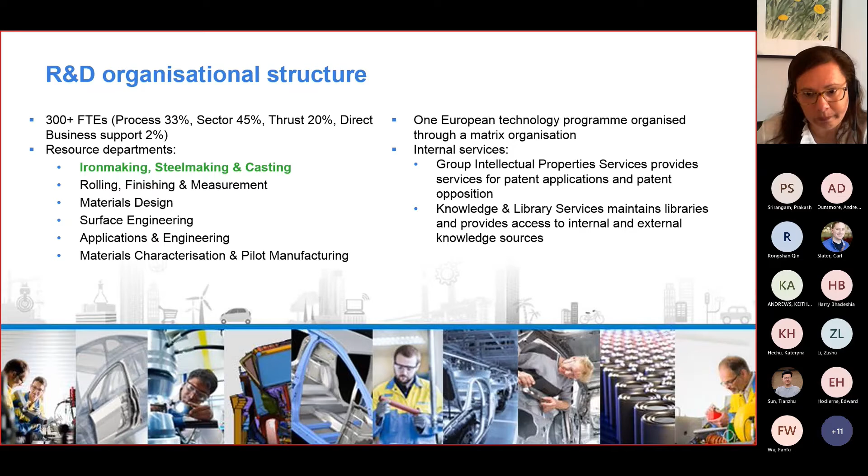We do not do everything alone, so we broadly collaborate with universities and institutes. Sometimes we also collaborate with competitors on a project basis, for example on RFCS projects, across knowledge groups, universities, and institutions. You only win and enhance yourself, and thus enhance the research.

We have collaborations within the Netherlands with most of the universities there, but also in the UK. Warwick and Swansea are very keen partners to collaborate with us. However, that is not all. We also collaborate outside Europe, for example with the McMaster Consortium, with USTB in China, and the Continuous Casting Consortium at Colorado School of Mines.

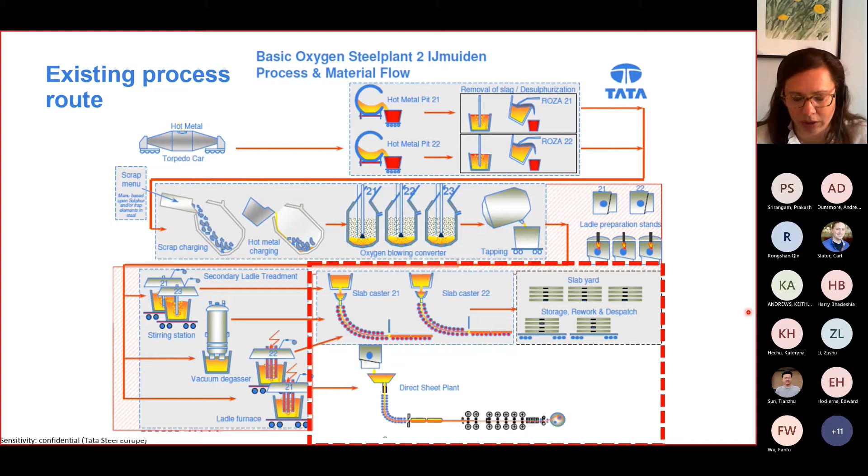But we also have a thin slab caster, which is a caster for thin slabs, which is directly cast, reheated in a homogenized temperature in an oven, and directly rolled afterwards.

In this overview, I wanted to show you the past, present, and future of solidification research. And before that, I would like to explain a little bit about some interesting concepts.

We find it as a key concept for solidification and casting. The solidification of a steel will really be a fingerprint that marks many of the properties of the final product.

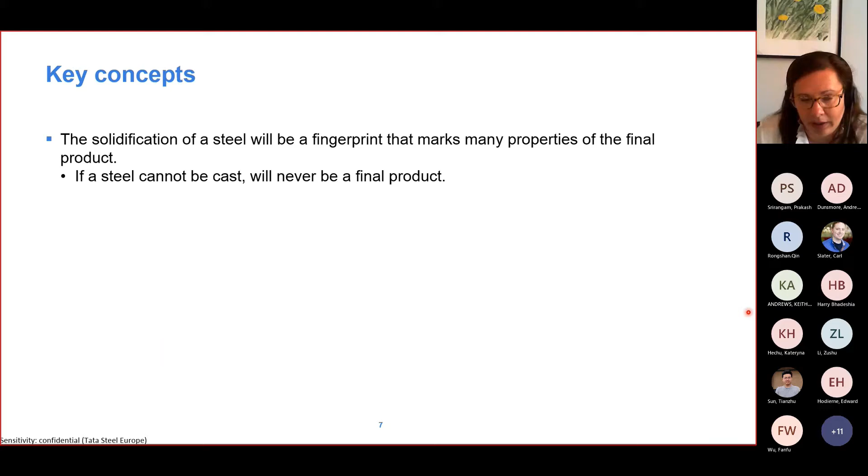Moreover, if a steel cannot be cast, if we design a steel or a composition that cannot be cast, it will never be a final product. And the question is not if we can cast a steel, but how can we cast it?

So I am a strong believer that there is almost always a way, almost always a process that you can cast a particular composition, but how are we going to do it? And your selection of which process, that's your choice.

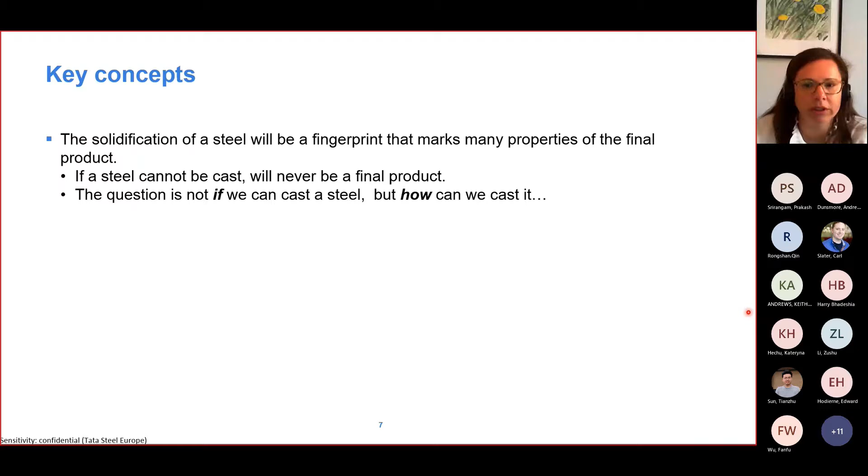For that choice, nowadays there are tools, mathematical and physical models, available to help on understanding and to make a choice on the process parameters. But these tools are used wisely, we are obviously not the only ones using them. They all help you not only understand the actual process for troubleshooting, but also for designing new steel grades. But you know what? A model needs material properties.

Let's not forget that the thermomechanical behavior of steel depends on each steel grade. So the chemical composition of that steel grade is very important, and it will mark many of the thermomechanical properties. Moreover, there is a mechanical effect, and the deformation during a process, during continuous casting, is very dependent on the process itself, on the process parameters.

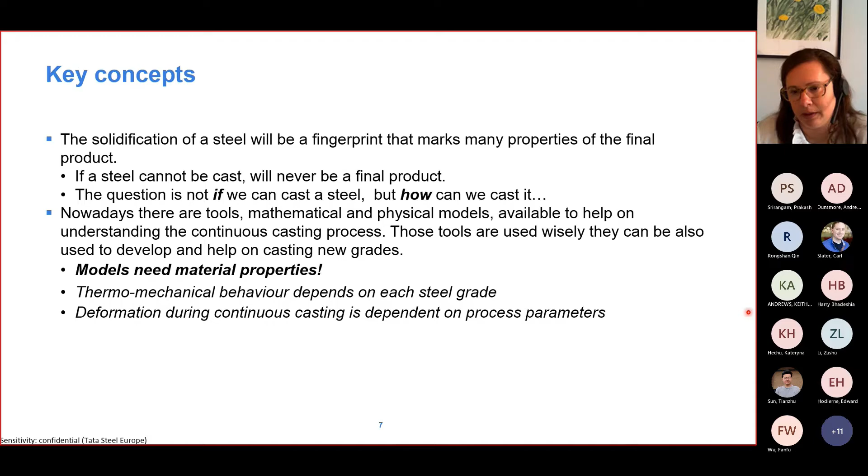If we focus a little bit on casting and continuous casting, basically we have two regions. We like to call the first region the mold region, where the steel starts to solidify, the slab is born, and the solidification range, or at least the temperatures we handle at this stage, are rather high. It is normally between liquidus temperature and solidus temperature. Both the liquidus and solidus temperature could vary a lot depending on the steel composition.

On the mechanical side, here is where we have the first ductility trough, and it is considered to be between 0.9 to 0.99 fraction of solid. Again, it's very dependent on steel composition.

The second region is the secondary cooling region. This one has a much broader temperature range, more or less between 1300, where it exits the first region, up to about 700. Below that, it's not normal. It could happen, but it's not normal in continuous casting because the steel becomes too stiff and too cold to be able to move it and further process it, or at least extract it from the machine.

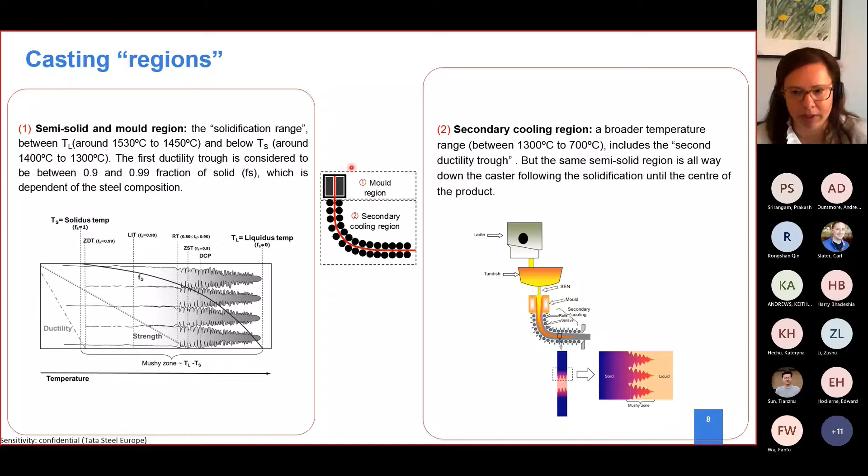No, this didn't go that good.

Two regions for research: if we focus again on the mold region, or at least the semi-solid region, what do we need to research to understand that region, to explore for new steels, for example?

Well, first of all, we need to simulate the cracking and the continuous casting conditions. That's very important because a defect in a product will never be solved. But moreover, we need to understand the solidification, particularly of new steel grades. There are very advanced high-strength and ultra-high-strength steels. They are extremely challenging, not only because of their chemical composition, but mostly because of their complexity. And that includes also, for example, precipitation.

What we have internally at Tata Steel, well, we have something I will show you later, called the Mould Cracking Simulator. We have a thermodynamic software - we have Thermo-Calc, and we have MICRESS, which is a microstructure phase field simulation software.

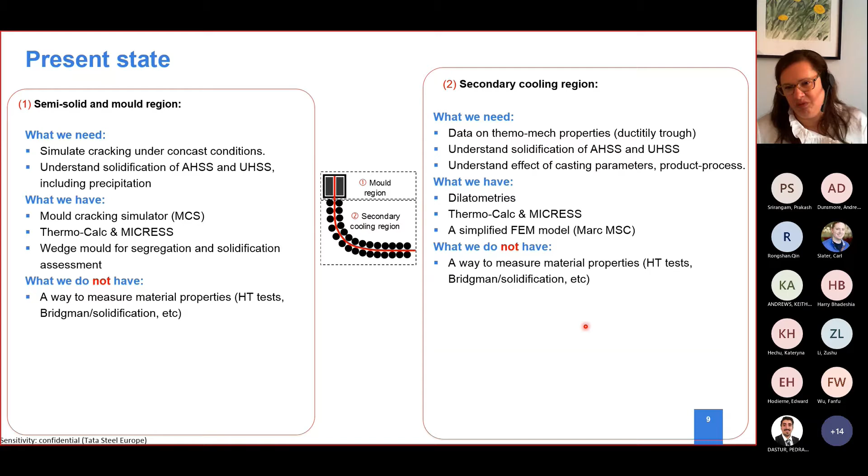But why? Why do we need the modeling and solidification lab tests? First of all, we have CALPHAD, so calculated phase diagrams. And what is the relation with steelmaking?

A long time ago, a very simplified way was the carbon equivalent formulas. So you had a way with a simple formula - it's still used, by the way, on a daily basis. It was a way of seeing what would be the effect of other alloy elements rather than carbon, as if they would react the way carbon would react. It was also easier because it was the carbon phase diagram. So this is like seeing in black and white, really.

If you would have gone to 16 colors, let's say, you would have ternary and quaternary diagrams. However, probably the most used way nowadays is when you are with some more colors, 256, with a thermodynamic software. So when you have complex systems, you just cannot simplify everything in black and white. You really need a broad range of understanding.

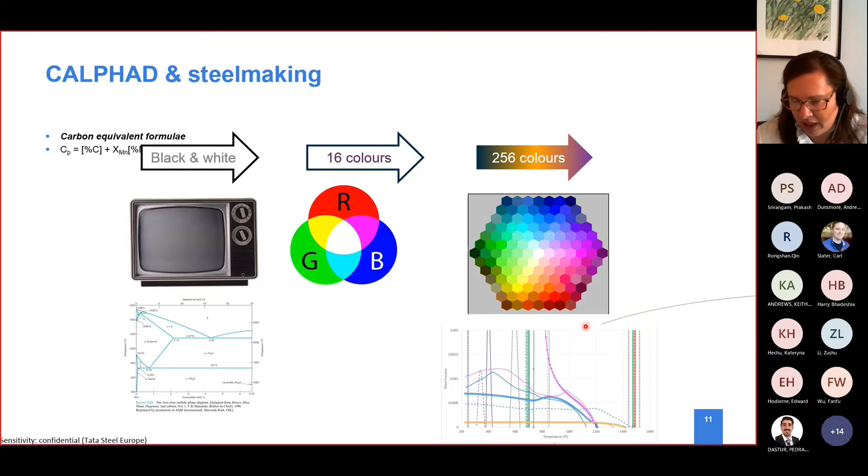So with phase diagrams, you know, you can calculate a lot of things. Nowadays they are fantastic programs - fantastic software to calculate either phase diagrams or at least phase fractions, which is much more useful than a single phase diagram or a pseudo binary diagram.

However, the calculations are done on equilibrium. You could use Scheil, but it's the extreme. The reality is really in the middle - between equilibrium and Scheil.

But then sometimes you need something that tells you about the precipitation, the precipitate composition for each steel. You could also calculate it with Thermo-Calc or with any thermodynamic program. However, it's a simple method - it is good enough, it's not bad at all. It's much better than a carbon equivalent formula.

But you need kinetics. So there are some limitations that you have to be aware of. Just remember, going from a black and white simplified iron-carbon system to a multi-component system is not easy - not only to calculate it, but also to understand it, particularly on a daily basis for steelmakers.

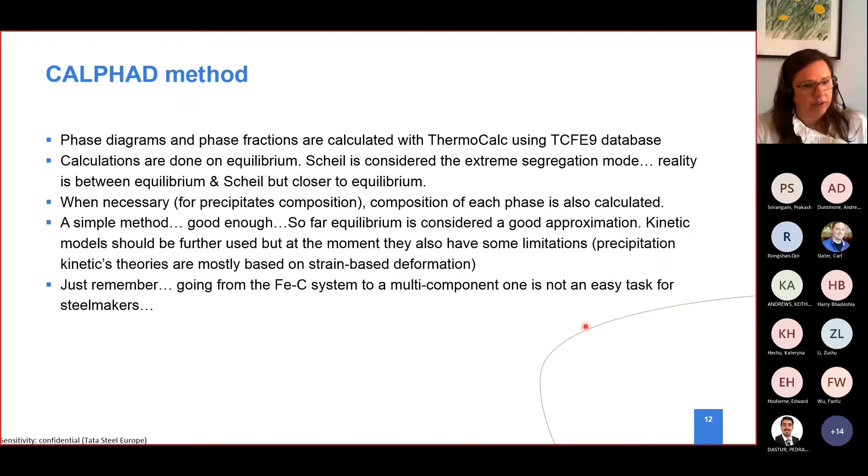Again, the question is not if we can cast the steel, but how can we cast it? And I will show you how.

Thermodynamics are helping us, or have helped us, to understand the steels. Kinetics, again, you need some kinetics for the precipitation, but with an equilibrium, you are good enough.

We know that when you have high strength, low alloy steels, they are known to have microalloyed elements. Why micro? Because they are alloyed in a very small amount, so micro scale. Sometimes it's boron, for example, at the level of ppm. So they have very, very little amount of these elements in the composition, but this very small amount affects broadly the ductility of the steel.

It is very well known that even though they are beneficial, because we add them to the composition to improve the final properties of a product, not for nothing, you have some disadvantages during processing: they are known to have a ductility trough. I explained before that the first ductility trough happens at the semi-solid region. But then while cooling, you have a second and sometimes a third ductility trough, or even an overlapping of several troughs, depending on the precipitation, the processing, and the phase transformations happening due to the chemical composition.

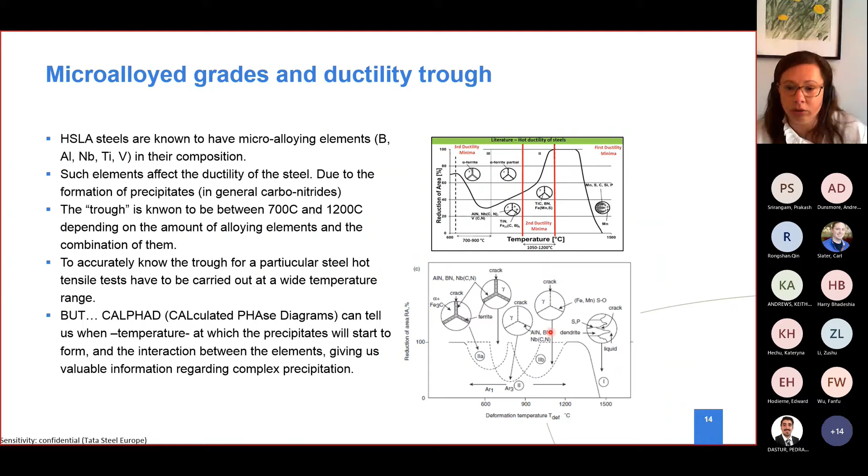But what happened? Why are we interested in this? Well, if this precipitation happens, if you have a ductility trough, it means your steel is less ductile and it could even crack if it exceeds certain stresses during casting. That point is very important because it happens, depending on the precipitation of the steels, either at the bending or at the unbending of the continuous caster.

Here are some examples of how the cracks look. On a slab, they are normally transverse cracks. This is the casting direction, so the cracks will be like this here. This is a corner crack. But eventually, if I don't see these cracks and the product is rolled, it will look like this.

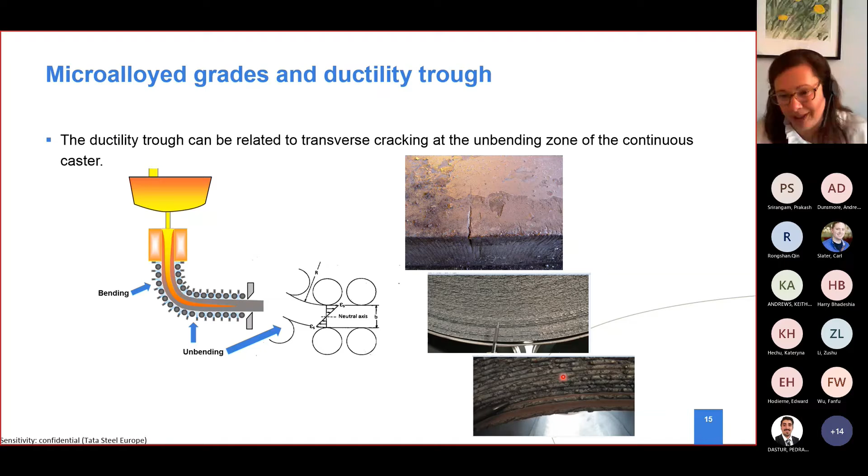Well, this steel was certainly not meant to make serrated knives. Really not. And so this is not something that we want to sell to our customers.

In this example, so what happened? We have a chemical composition that's somewhat peritectic. We have quite some manganese. Aluminium is added for deoxidation, but we need to take it into account because at least a quarter of the aluminium added, even for deoxidation of the steel, could bond with nitrogen, because we have quite some nitrogen, at the ppm level. And then we have some niobium and titanium in this steel.

So let's use ThermoCalc. Let's see what we get in a phase fraction versus temperature phase diagram. If I zoom in on the areas where these precipitates start to appear, ThermoCalc is very flexible, but we need to understand what is happening here.

ThermoCalc says each precipitate is a new phase, that's how it calls it. So for us, it's a precipitate. Indeed, if you saw the microstructure, you could consider it a new phase because it has a different crystallographic structure. But depending on their composition, their affinity, and temperature obviously as well, this is equilibrium again, they will appear at different temperatures.

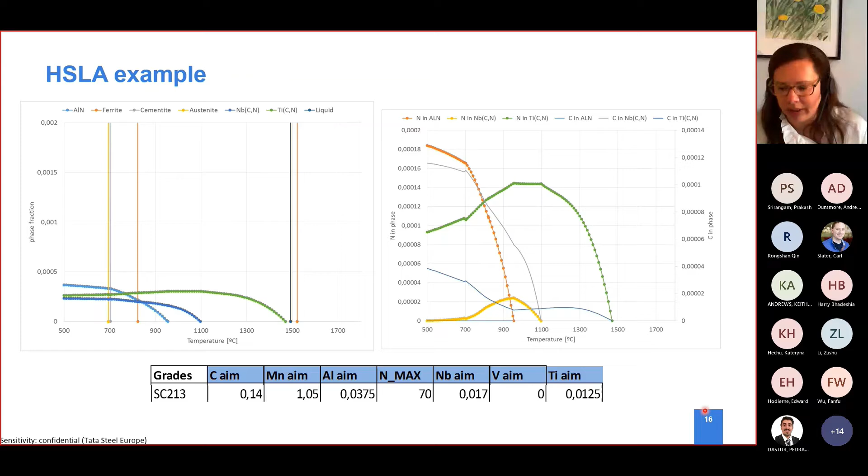Please carry on. So this seems very complex, what do I get here from? What we get here is the complexity that we cannot get from a simple carbon equivalent formula or a simple phase diagram. We need to go deeper and try to understand all these interrelations.

If we know when these precipitates appear, at which temperature, and what is more or less their composition, combine that with an FEM model of the temperature of my slab, what we can do is know exactly which areas, or at least which temperatures, we should avoid at the bending and unbending zone. If we avoid those areas, we avoid the zones most prone to the ductility trough, and therefore most prone to cracking. So if I avoid those temperatures, I avoid cracking. Simple as it is.

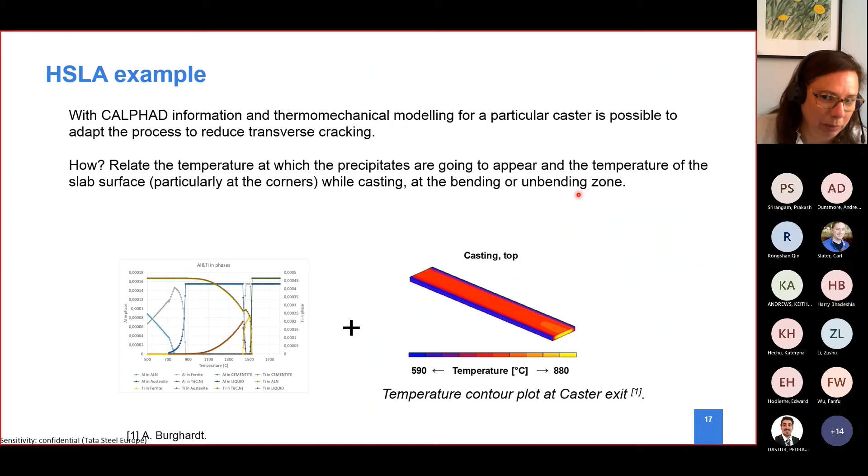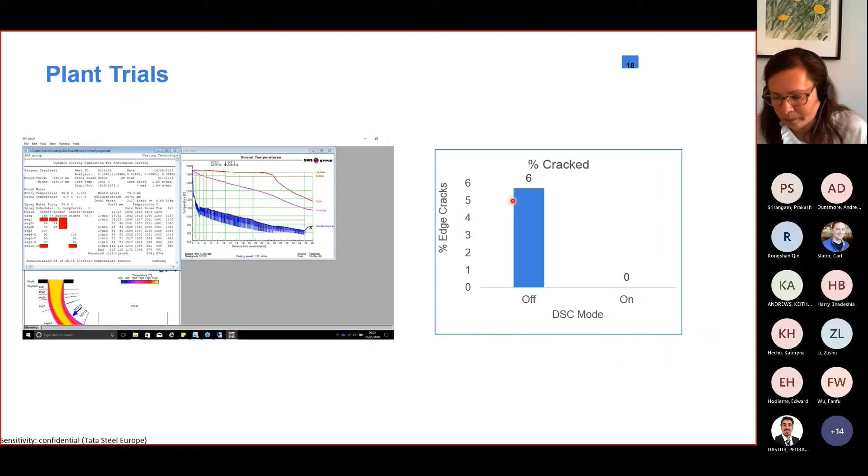That example was done for one of our casters at Tata Steel, India. Based on that information, we redesigned the cooling of the caster together with them, in order to reduce the cracking susceptibility. The results speak for themselves: with the dynamic cooling as we redesigned it, we don't have any cracks, but with the old cooling, we have a lot of cracks.

Another interesting example is when you have an advanced high-strength steel with boron. Boron is at ppm levels again, could be 20, 30, even 50 ppm. It's a very low amount, however boron is an element that highly influences the solidification of the steel.

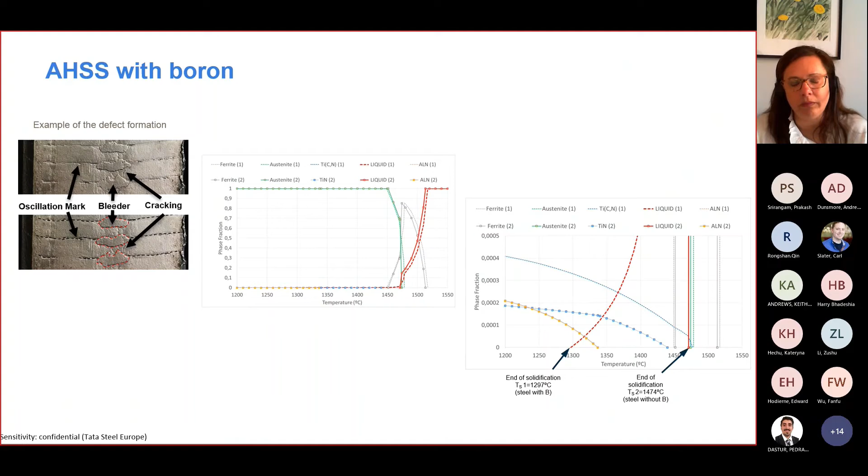Therefore they do not have enough strength to hold, and they will bleed. Boron steels also have something very funny, a not very well known transformation called a metatectic transformation in a phase diagram. What happens is exactly the opposite, like turning upside down a peritectic transformation.

In a peritectic transformation, we go from two phases, a liquid and a solid phase, and transform to another third phase which is also solid. In this case it's the other way around: we go from one phase that is fully solid, and transform to another two phases, one of which is liquid. So practically everything has solidified, and suddenly you have liquid again.

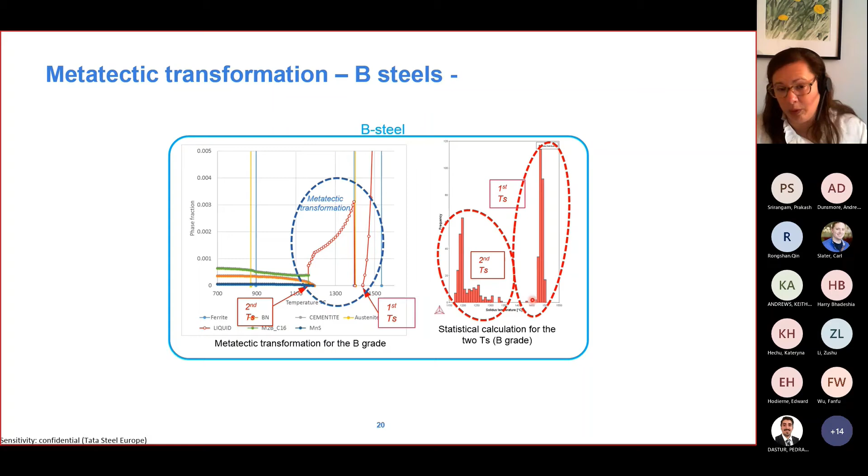Luckily a lot has been studied, not only by us but also around the world. There are lots of publications about this metatectic transformation in steels alloyed with boron. Thermo-Calc, or a thermodynamic diagram, nicely shows us the different liquidus and solidus temperatures, because you will have two liquidus and two solidus temperatures in this case. Here I'm just plotting solidus temperatures, but you have two of them. You have to be aware of that as well.

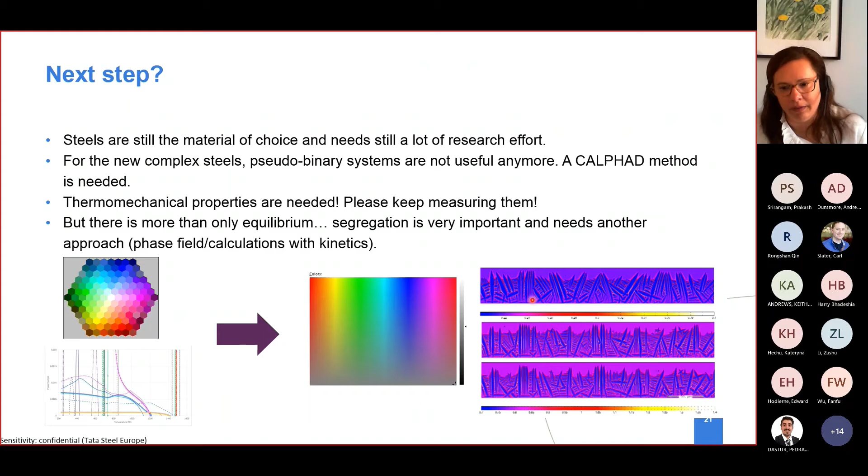What's the next step for modeling? As I said, from 256 colors we could have millions of colors, and the millions of colors is approachable in the way of modeling, if you go from a simple equilibrium or simple kinetics phase diagrams or thermodynamic software towards, for example, phase field. Phase field is a fantastic tool to simulate many things on solidification, because you have not only the phase diagrams and all the thermodynamics, but also kinetics, and you could even have fluid flow.

But what kind of tests do we have, or have explored, for understanding the steels? Because models are very nice, but they are very idealistic. So what do we have? One of the nicest things we have done is together with Kateryna, who did a PhD with you guys in WMG.

She did in situ observations of the solidification, focusing on peritectic steels, hypoperitectic and hyperperitectic steels. I won't go into details, but the fantastic thing was fitting a thermal imaging camera in the confocal microscope. With it, she could follow temperatures and shrinkage differences during solidification.

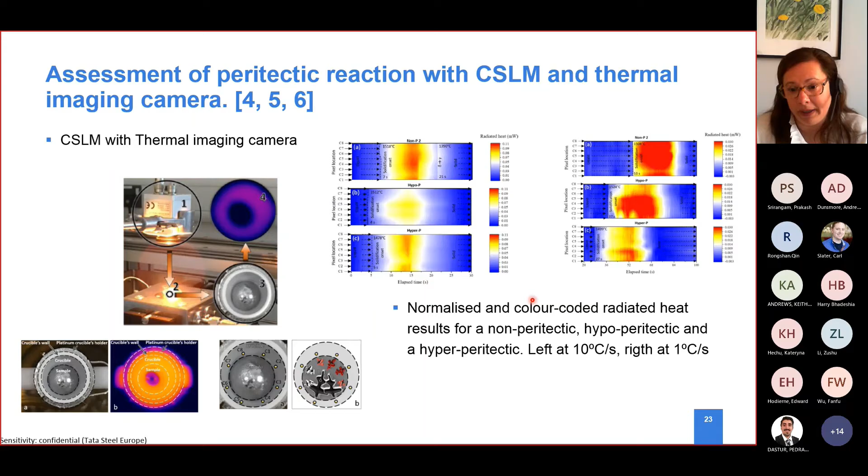Why is it so important to understand that, particularly why we focused on peritectic grades? Because while we cast, peritectic grades are very prone to shrinkage. The shrinkage is associated with, or happens because of, the phase transformation I explained just before - the peritectic one.

So you go from two phases, one liquid and one solid, towards a third phase, which is another solid phase, and the crystallographic structure of that phase is much more compact than the other one. Therefore, there is a shrinkage at the atomic level, at the crystallographic level, seen in our process as shrinkage during solidification of the whole steel shell.

So if the steel shell shrinks and detaches from the mold, what happens? It doesn't extract its heat. If it doesn't extract its heat, it cannot solidify or further solidify, so it cannot further grow as a shell.

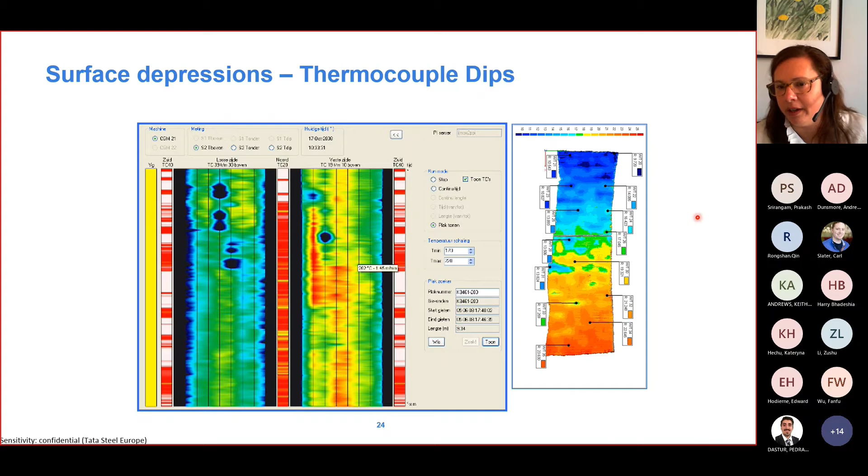So a test on a lab scale gives us so much information directly related to a process parameter and a process defect, which is very, very valuable information for us as industrial partners. Another method - because thermal is very nice, but we also need something mechanical.

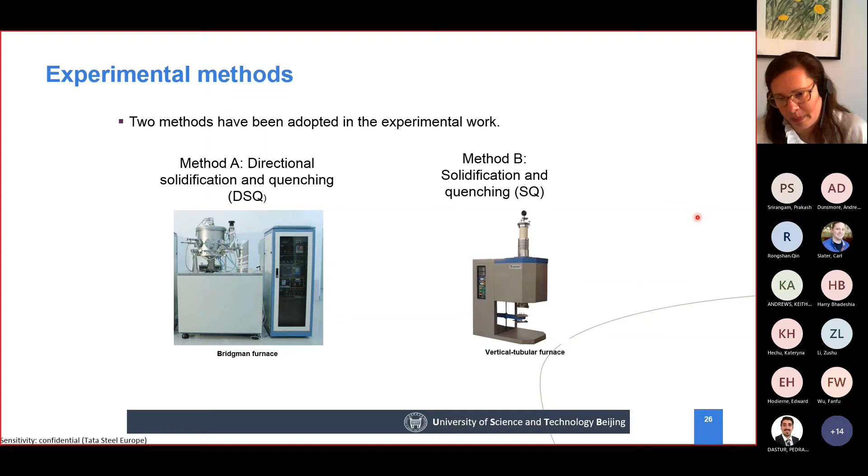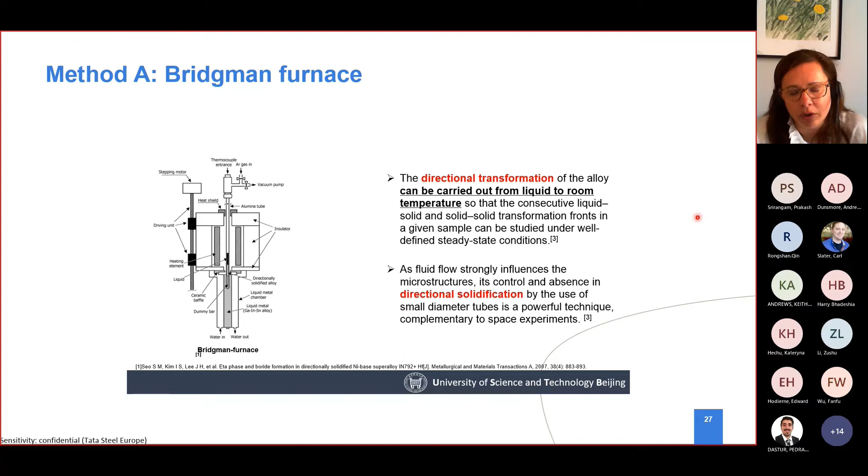The first method, the Bridgman furnace, is very well known - directional solidification where we could follow the microstructure. Why is that important? If we follow the microstructure, knowing and quenching it at a certain moment, we can directly relate that to different important temperatures related to the solidification of a particular steel.

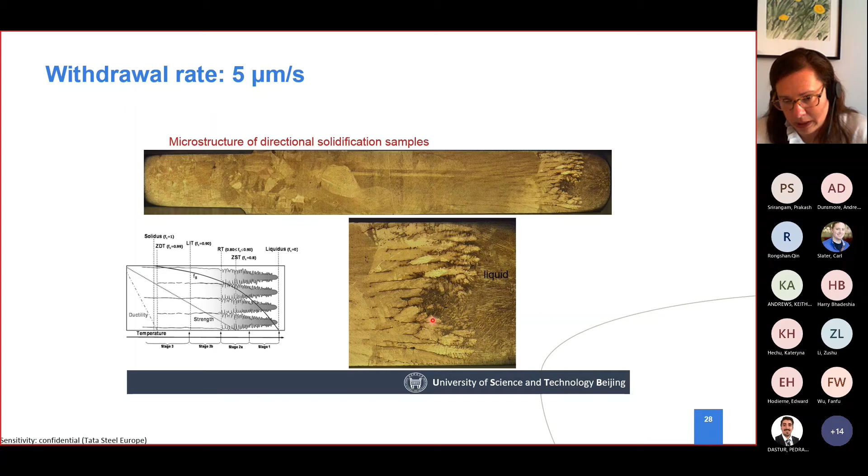The sample is small, but with this directional solidification, if we quench it and cut it into different slices, we could also follow how the segregation occurred, and how the liquid and solid phases solidified, appearing here.

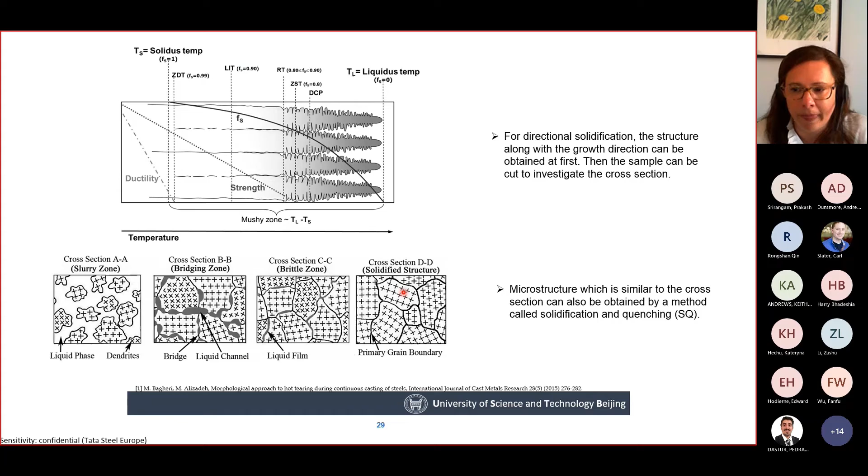So if we use the second method, solidification and quenching, what happens? We heat up and melt the sample, then drop it to cool it down, either in oil or in salt water, to directly cool it down and quench it.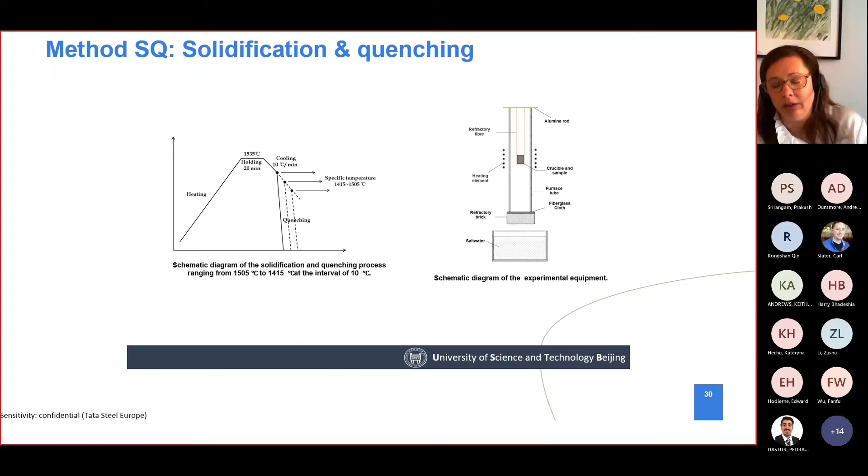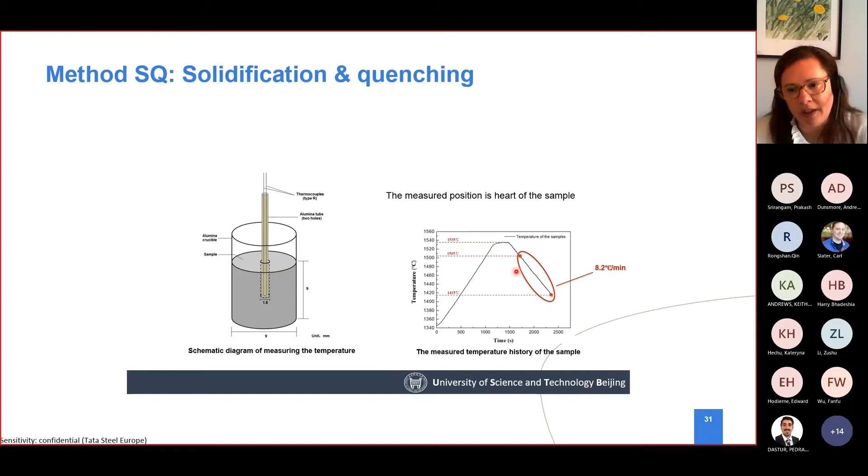We follow it, trying to track it with thermocouples to see if what we set up in the system is what we really get, because otherwise we have no way of following it. And it is very, very accurate - only a few degrees difference in the quenching.

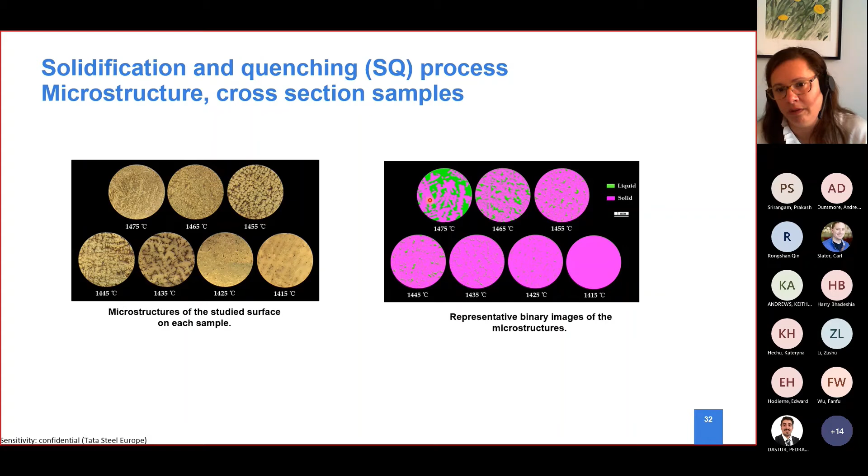How does it look? If we take out one sample and quench it at different stages, we get different microstructures. With simple image analysis, we can relate the areas between those dendrites to a liquid phase that solidified very fast, compared with the solid phase that was solidifying during this quenching. We can follow the liquid phase fraction from high temperature to low temperature for this particular steel.

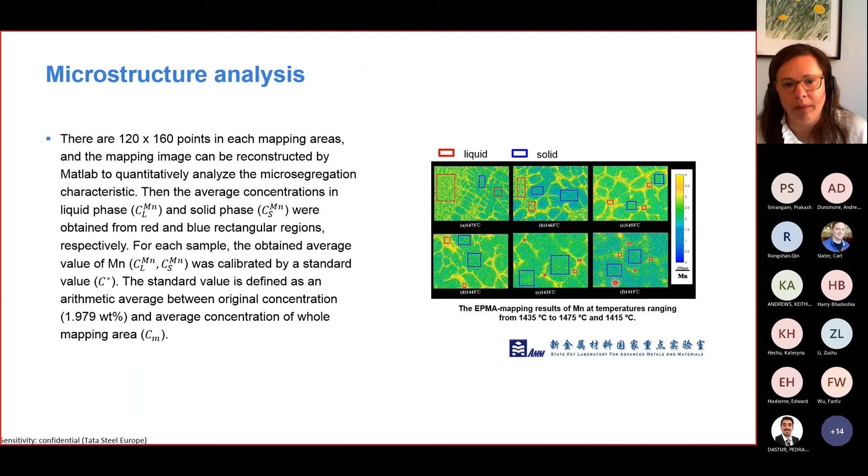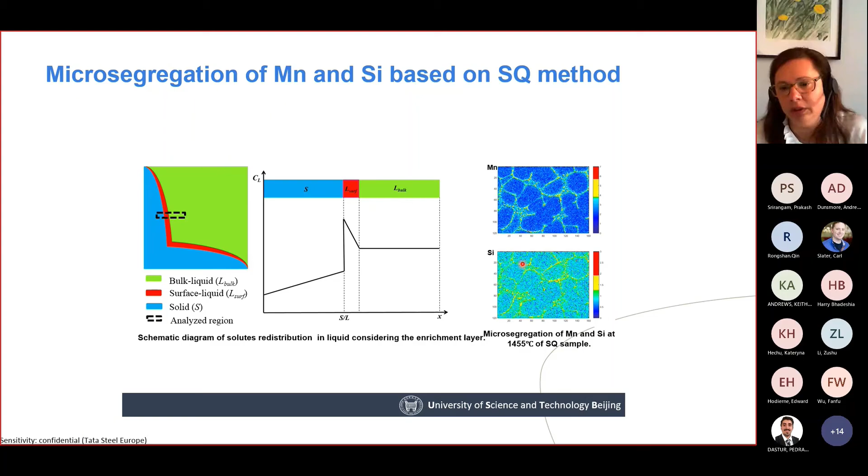If we combine that and use the same samples, go to an EPMA and map it, then try to understand the segregation of different elements, in this case manganese and silicon, we could get even more information. Knowing, for example, from a simplified phase field diagram approach, that there is an interface between the solid and liquid, let's say in between. That interface, also for phase field, this is a very important concept, could have a different segregation.

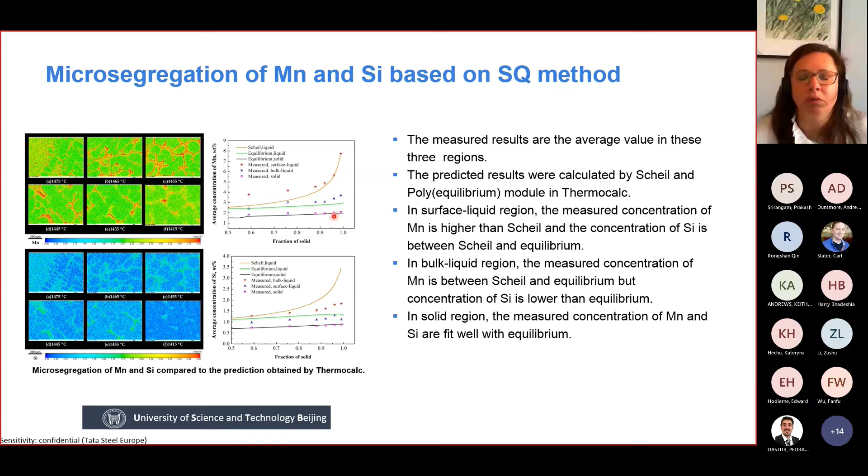So what this says is we can trust what we calculate because it's quite accurate compared to measurements. That's a very important concept. But why do we do all this? Why go through the whole thermodynamic evaluation, the phase field approach, and all those painful measurements and tests? It's simply because segregation is the fingerprint from solidification that will mark many final product properties, and many defects in the product are directly associated with segregation.

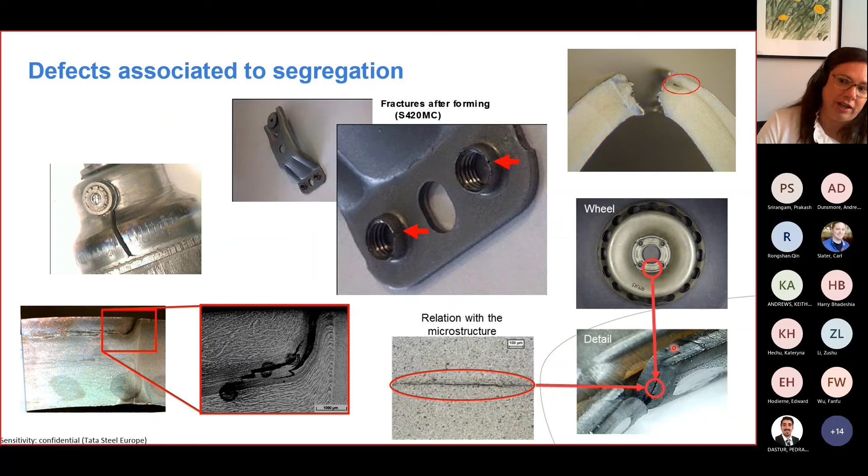Moreover, here's another example of a wheel. While forming it, it has opened up like a book, really. This is associated with central segregation. So the strip itself has opened up in two. Honestly, I'm not sure about you guys, but I don't want to have this in my car. I don't want to drive a car with this kind of wheel, really. I want a better one. That's why we do it.

Another method, which has also been done with another student from Warwick University, is the wedge mold. We had a static design of an ingot with different thicknesses, stepwise, to measure different solidification or heat extractions on one single sample. Why is that? Because if we have a new steel and several choices of casters, I already explained we have three slab casters and one thin slab caster.

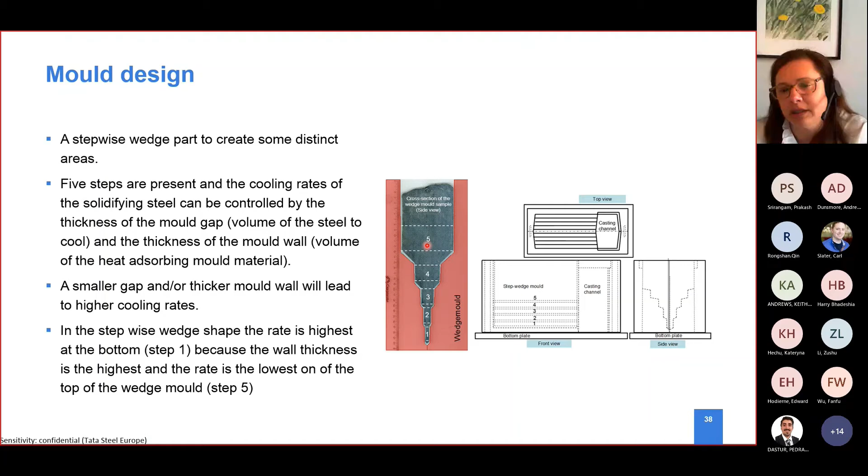Sometimes with a new steel, we don't know where we're going to cast it, or if it's even able to be cast on all the casters. It could be, but we have to make a choice. Therefore, this is a very good approach. Why? Because in one single sample, one time only, you have step 5 and step 3 representing different casters. Step 3 will be very comparable to the thin slab caster, and step 5 to our slab casters.

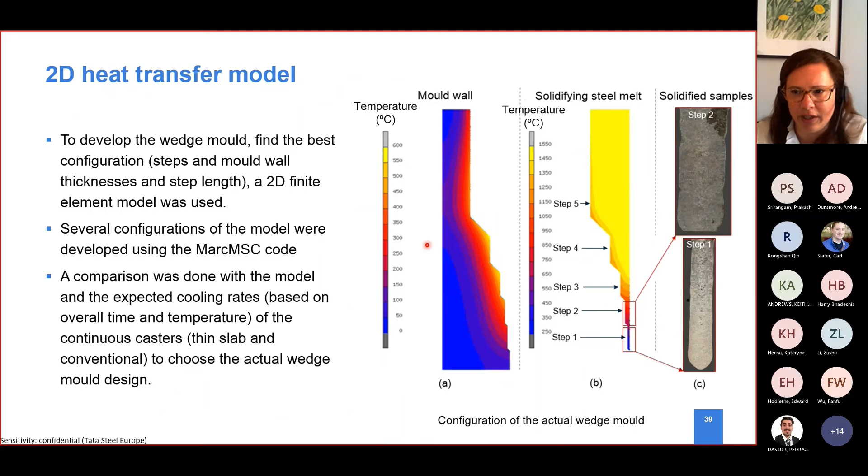How we did it: we combined a heat transfer model with this analysis and the analysis of the microstructure itself. We also know the primary and secondary arm spacing of the dendrites, which is directly or indirectly related to the local solidification and local cooling conditions. So in one step, in one ingot, we can get all that information.

Moreover, we could even take samples for segregation, micro and macro segregation, and analyze it in the lab. So with only 25 kilos, we have a lot more information than if we had to cast it with 325 tons of steel.

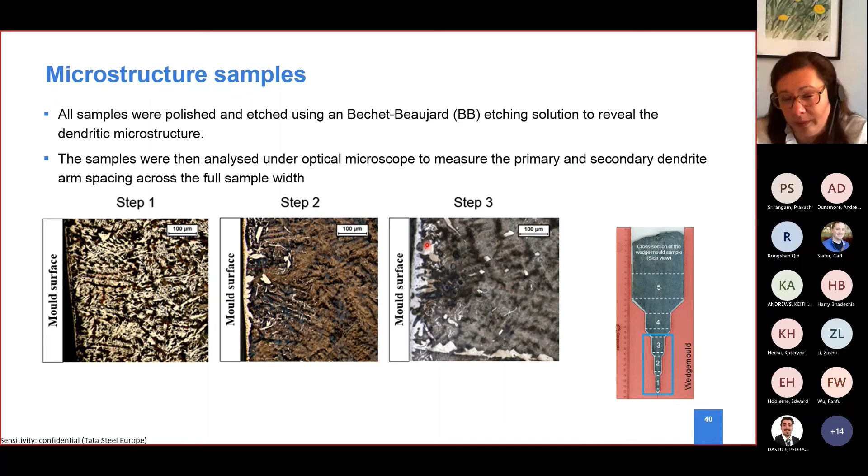Moreover, why is it so important to know that? Because we need to understand the effect as well. That was a static method, but we need to understand the effect of the fluid flow.

Arunava has also built his own model of a single dendrite and the effect of how that dendrite has grown based on a macro fluid flow. Not the fluid flow directly related to the segregation of the dendrite, but the macro fluid flow of filling of the caster.

Going back to a slab caster sample, if we know this information, how that dendrite bends following the flow, we could also relate in a very simple slab caster sample how our whole macro fluid flow and flow pattern is in the whole caster. So once again, we have a lot of information in one single PhD.

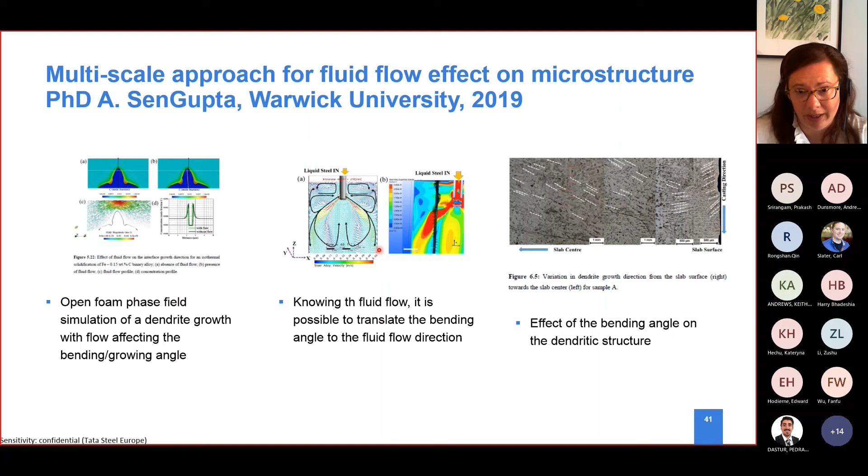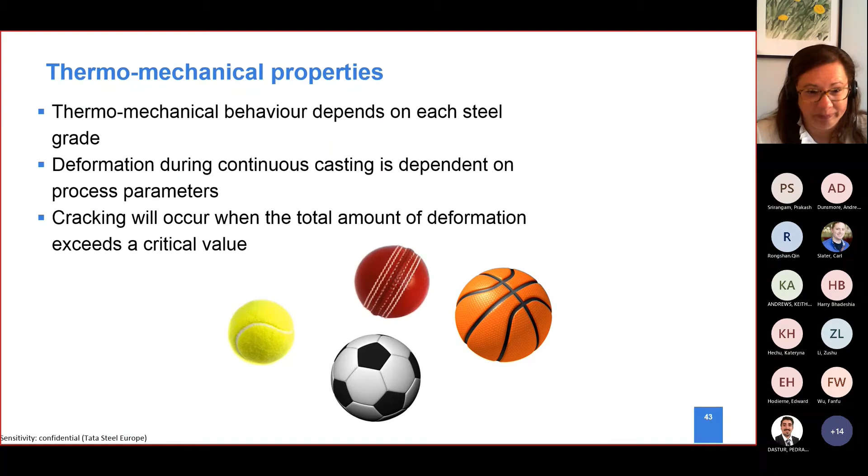A steel is a steel, but the elements added to the steel make it a different material. So here, a ball is a ball. But I would not advise you to play tennis with a cricket ball or football with a basketball - we all know the consequences, and I think most of us have tried. But why is this so important in the process itself, where I talk so much about deformation and thermomechanical properties?

Because when things go really, really wrong and it breaks out, that breakout is only the tip of the iceberg. It breaks out when it really goes wrong, but it already goes bad when we have cracks. So first cracks, and then it breaks out. Luckily, breakouts are really rare on a regular basis. Cracks, well, we have a bit more than breakouts. But the cracking and solidification issues behind all of this, it's even more.

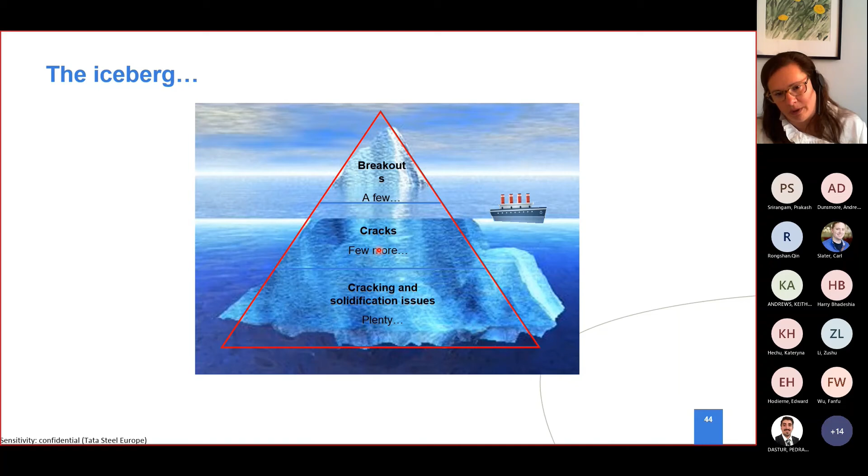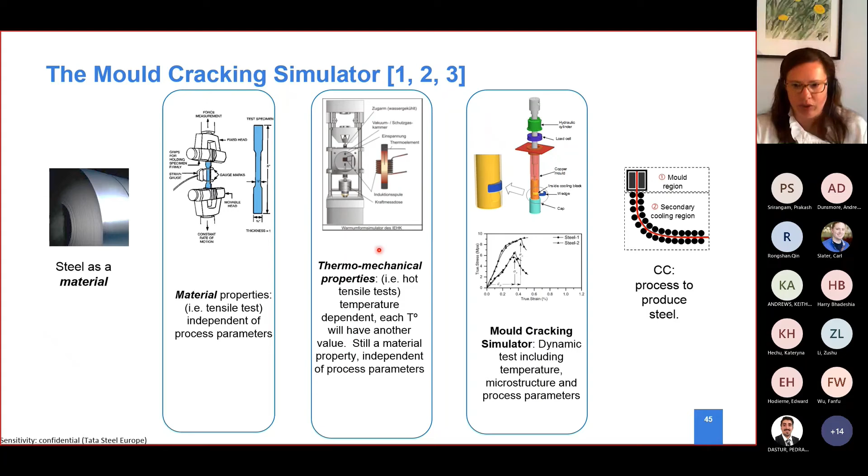But why? Steel is a material, so we could have material properties from just tensile tests. We could have thermomechanical properties, so we add temperature to that tensile test at different temperatures. And we could even have dynamic models, physical models, to measure not only temperature and strength but also all the casting parameters associated to it. I will show you some examples of how we have done it.

In the hot tensile test, let's forget the normal tensile test because we are talking about thermomechanical properties. Temperature is very important in casting - at room temperature we cannot get that much useful information, so it's better to do it already on temperature. There are several examples: the Sumitomo test, an in-house method from Aachen University, and commercial Gleeble machines.

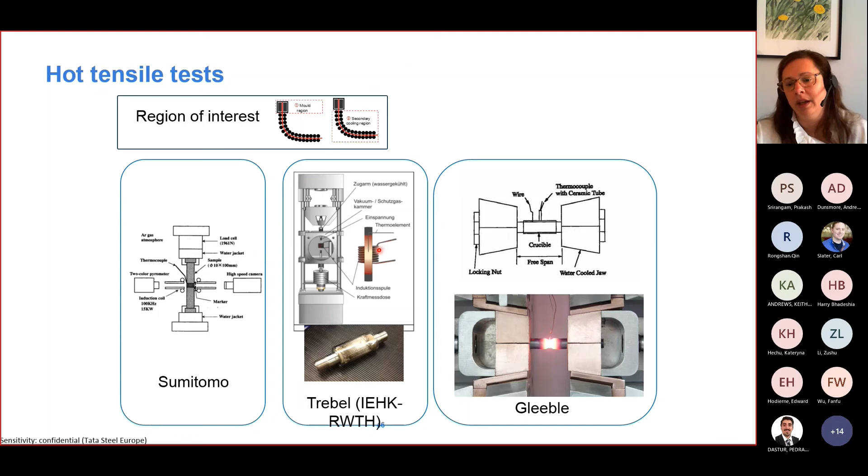But also, for the dynamic test, we have mold simulators worldwide. There are several examples - we have the split chill tensile test at Leuven University, POSCO has a multi-mold simulator with three related mold simulators, and at Tata Steel we have the Mould Cracking Simulator, which adds an extra element: the cracking.

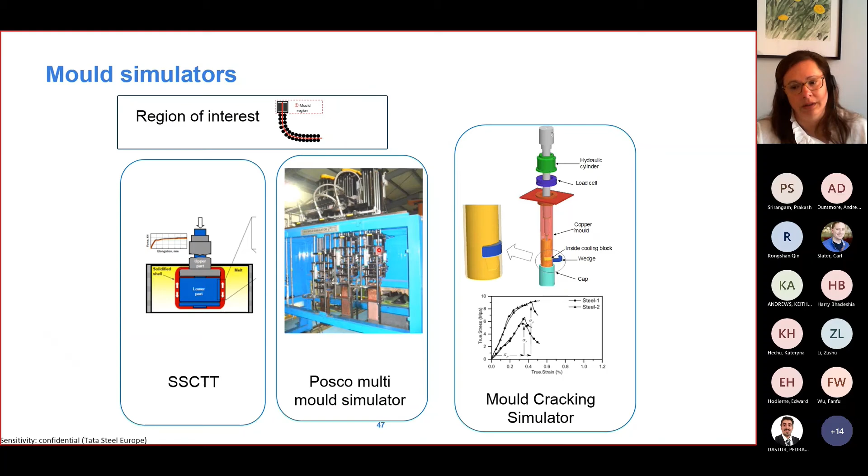But also there are some other tests that are very important for the secondary cooling region. It's not such a high temperature, not during solidification, but they're extremely important. We have hot bending tests, torsion tests, and there could even be torsion tests on the Gleeble itself. Together with Warwick, we are now exploring the hot bending test.

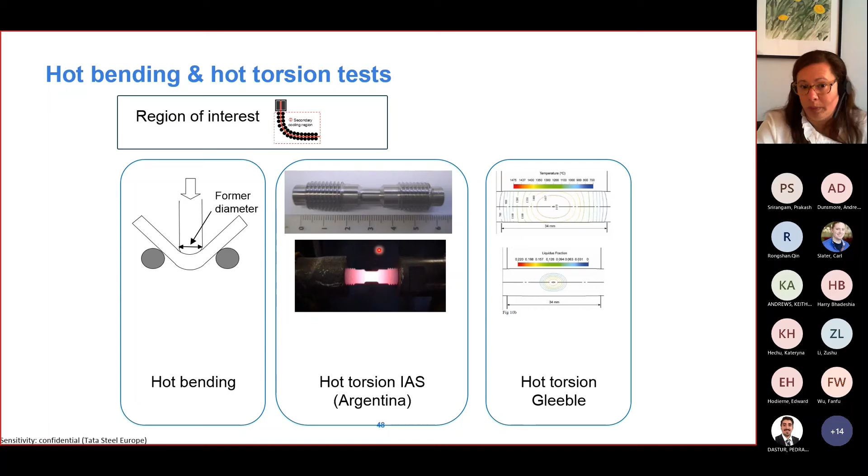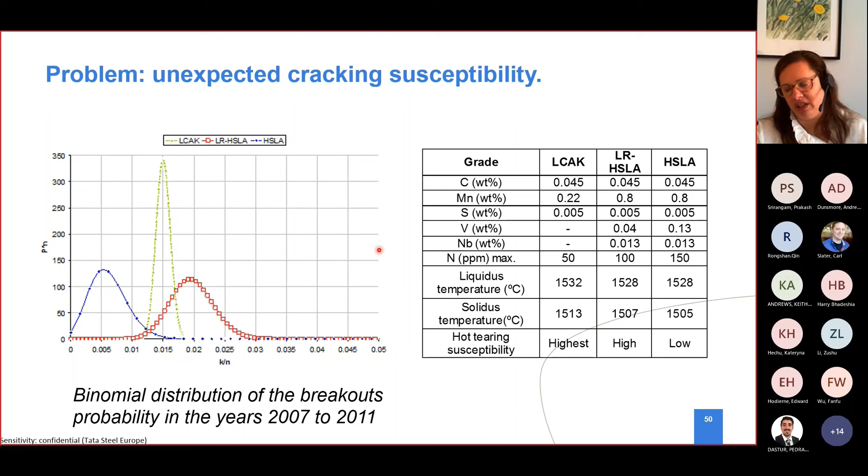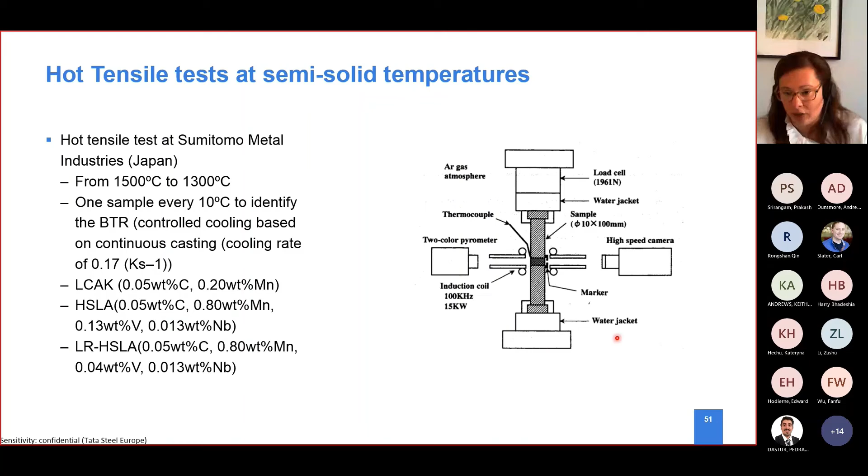How does the hot tensile test from Japan look like? It's a very nice device because it doesn't have any containment in the sample. The semi-solid region, at least the liquid, is contained by a magnetic field - an electromagnetic levitation field. And the sample is in a vertical direction, not horizontal like in the other tests.

That went wrong again.

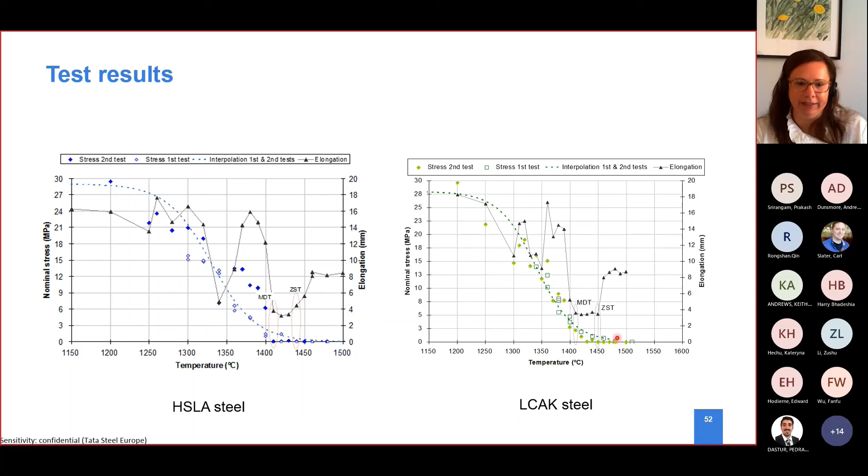What have we learned from these tests? We could follow in this test the first ductility trough, because it was so pure, there were no containments in it, so we could easily follow the first ductility trough. However, the collaboration unfortunately finished and we could not do more tests or more steels associated to that, so we left it there until another possibility comes.

We kept looking further and we went back to China, to the University of Science and Technology Beijing, USTB.

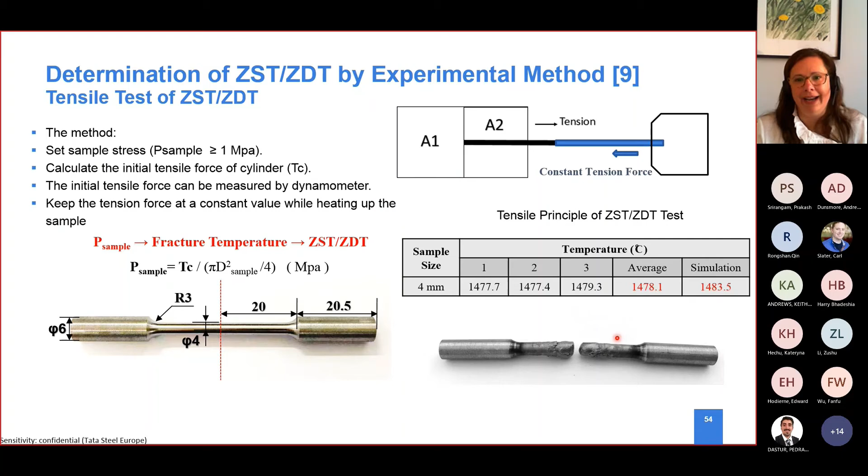Together with them, we explored and understood another method. This method is the opposite approach.

What do you expect from a tensile test? Normally, you have the sample, you put it on the machine, heat it up, and then pull it. In this case, it's the other way around: you first pull it and keep that tension constant. For example, you say, I'm going to pull it at 1 megapascal.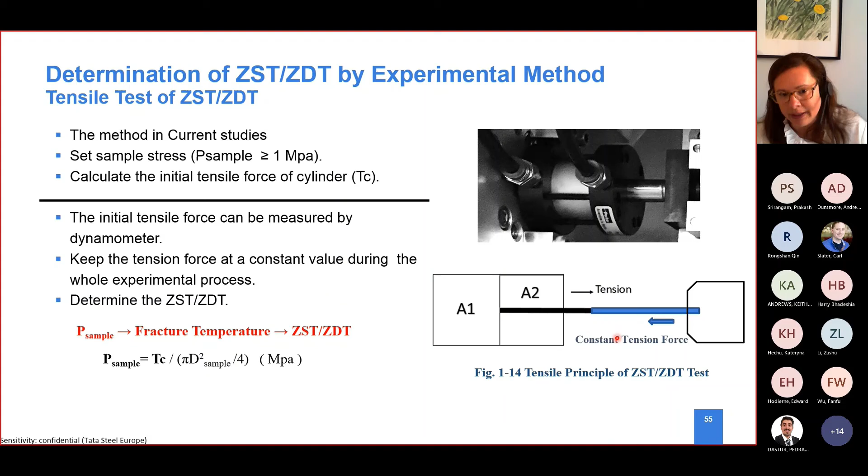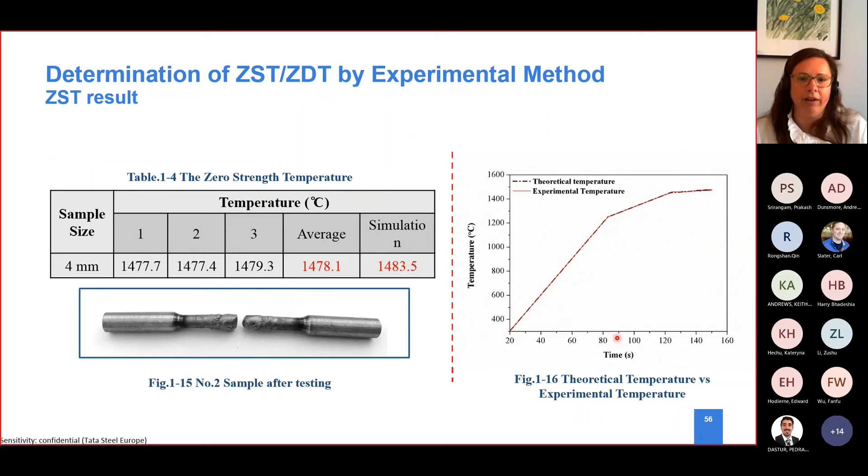At the temperature at which the sample with that exact fixed tension breaks, that's the temperature associated with your hot ductility. So if you do that at different tensions, you can also follow the ductility trough, giving you the zero strength and zero ductility temperature in an opposite way.

The mold cracking simulator, going to the dynamic part of it. This is something we have in-house. What it does is create a steel shell around a water-cooled copper tube, so it has exactly the same heat extraction conditions as a continuous caster mold.

Once it's been submerged in liquid steel, it creates a shell, and this half ring wedge is pulled outwards, pulling apart that created steel shell. With that outward pulling, there is a load cell related to it, and it measures the force needed to pull it out.

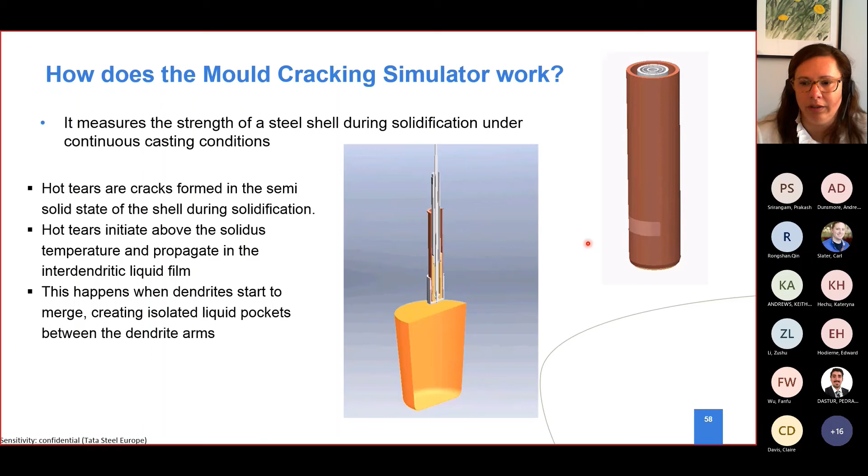That is directly related to stress and strain curves. There is a model in between the test and the true stress, true strain results, because that's related to the deformation, like a tensile test of tubes. So it's not a simple flat sample, but there are tube tensile tests as well.

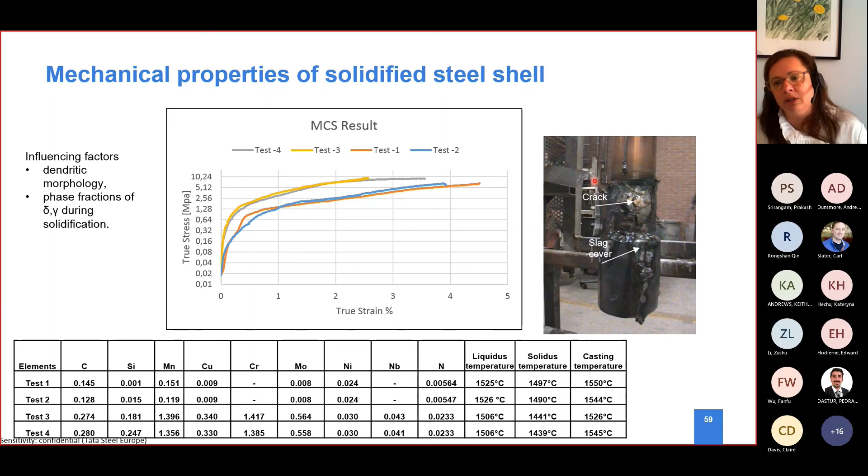We used that mathematical approach to translate results from the mold cracking simulator to true stress, true strain. What we have here is very promising results, important information on true stress, true strain of a steel that has solidified under continuous casting conditions, so it has the same microstructure and segregation as a continuous cast product.

I guess I'm just on time, but some conclusions. It's very important to select at least one method for each problem to tackle. I showed you several examples. It's not always possible to select one method that scans all temperature regions that appear in a continuous caster, so you have to find a way to understand the solidification range or the second ductility trough.

That really depends on your problem. For modeling, for example, it's very crucial to have good thermomechanical data, but the most challenging case is if you don't have that data. If your problem is the second ductility trough, you don't really need thermomechanical data—thermodynamic data or simulations to understand it is good enough. You could always improve it with tensile tests, or even what we're exploring now, which I think will bring a huge improvement: a 4-point bending test.

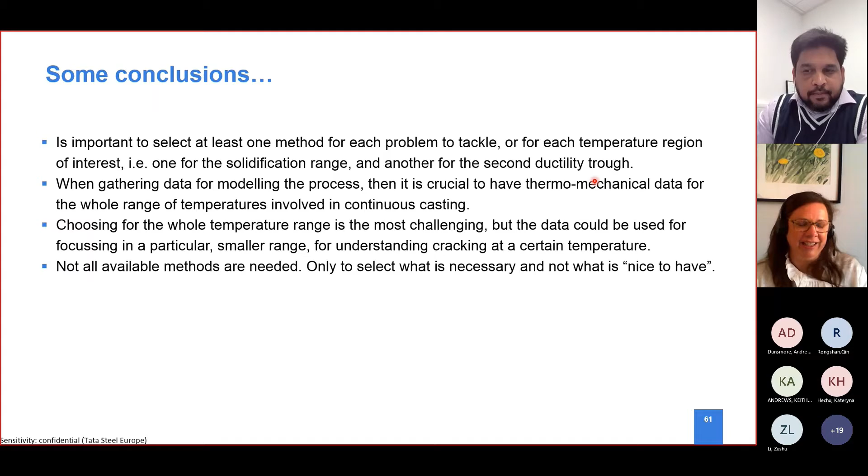So with that, I would like to thank you all. And if you have any questions.

Thank you, Begoña, for such a wonderful talk. I hope to see some questions from our audience. Any questions for Begoña? Either they understood everything or they didn't understand a thing—I hope it's the first one. Okay, I will ask one.

When you mentioned the boron addition, you see the liquid surrounding the grain boundaries near the grains, which could result in cracking. Did you observe anything of that kind of composition in a confocal test, cooling slowly to see whether the liquid reappears after solidification?

Not as directly, but it's a study already done. We already knew this when we started this study ourselves—it's published already. It was done by, well, Sridhar himself did it in the US a long time ago. So yes, they have seen exactly that: it solidifies and then suddenly remelts again.

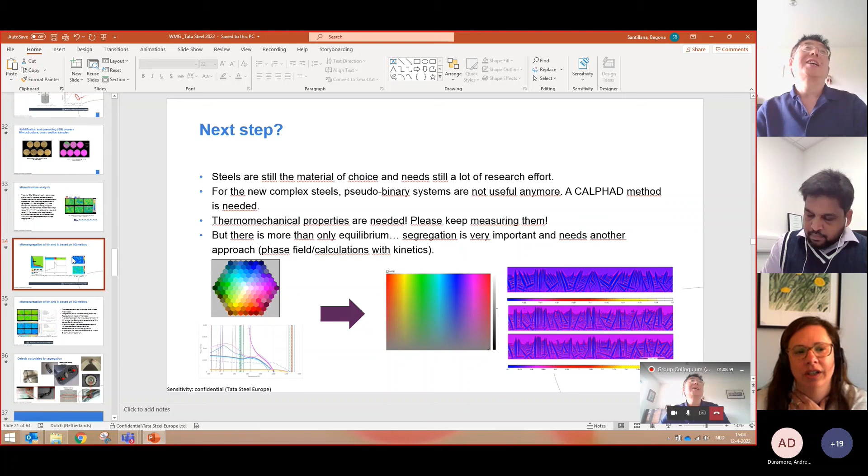In one of your slides, you showed a phase field simulation of the dendrite at the beginning of its formation. I see the interface thickness is different in different areas. This one, you mean? No, somewhere else. Oh, that was not a simulation - this you mean? Oh yes, you see, that's not a simulation, this is really EPMA measurements.

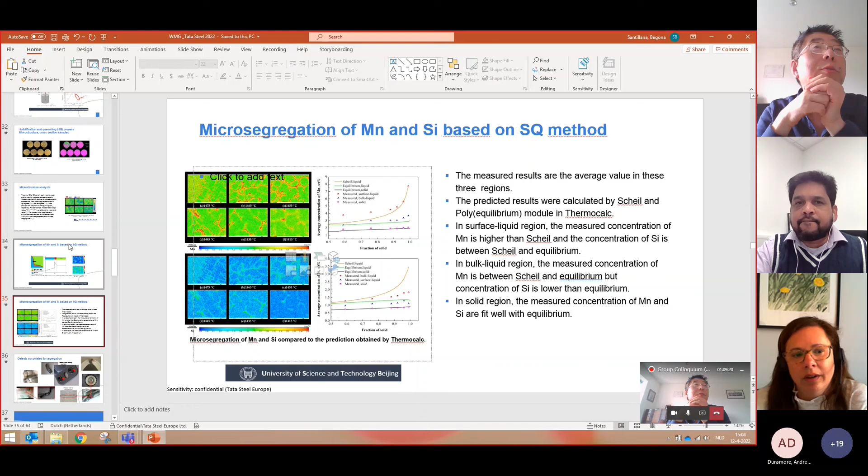Okay, so the measured interface at the valley is thicker than at the tip, right? Yes, the red one. Go to the previous page, page 34. Yes, you see between the dendrites, the red area is thick there, and the tip is thin.

This is very schematic, of course, and what we wanted to explain here is that it's not just direct from liquid to solid bulk - this is what you get. You get a variation between dendrites. This is one dendrite, and here are arms of other dendrites. So you could see here a top dendrite, and probably this one is another dendrite, and the difference between them is what matters.

Okay, good. Thank you very much. Thank you. Thank you. Okay.

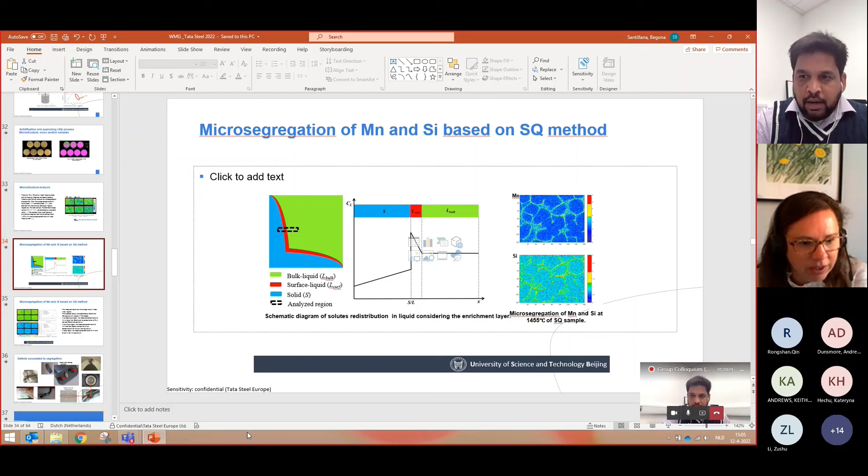Ajitesh, you can ask your question directly if you want. Oh, there was a question in the chat? Yeah, in the chat by Ajitesh. Maybe I can read it: for the mold step caster, how did you measure and gather data for segregation?

Well, first of all, we have not been using it for microsegregation yet - we use it for macrosegregation. So what we do is a line of overlapping OES PDA measurements along the whole thickness of the sample to measure the macrosegregation along the mold wedge sample.

But what Arunava has done, together with Katerina also here in our labs, is they have used each step of the mold wedge sample and measured the dendritic arm spacing from the surface to the center of each step. There are several formulas in the literature that correlate the arm spacing with the solidification, with the local cooling, etc. So that has been done as well.

So indirectly, you could say the microsegregation is there, mostly from the cooling that drives the microsegregation itself, but that has been done as well. Okay, thank you. Thank you.